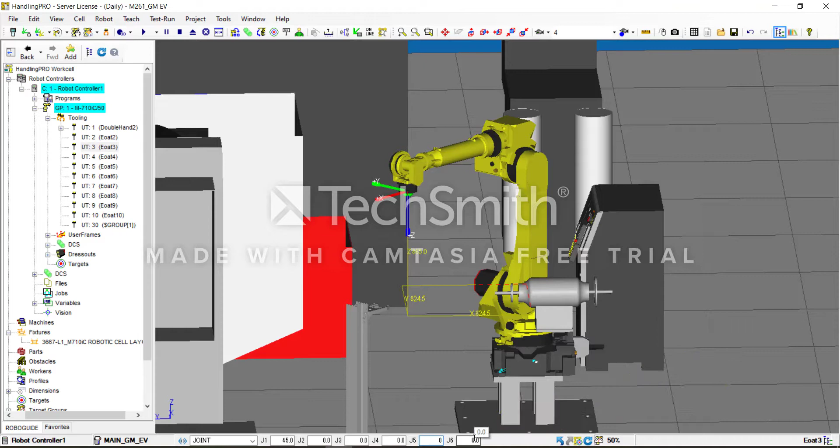Take note of the tool coordinate system's origin and direction. The origin is at the face of the end of arm, Z is away, and X is plus. So let's go to Solidworks and set up our end of arm tooling coordinate system so that it matches the robot's point and direction.

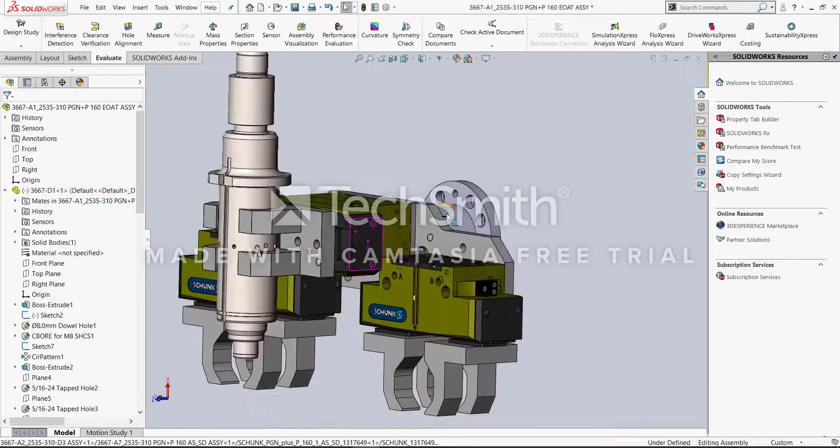So first, let's set the Z to the flange face. We will do this by mating the front plane to the flange of the end of arm tooling. And let's take a look at our coordinate system. It matches. Z is away, X is plus, and Y is to the left.

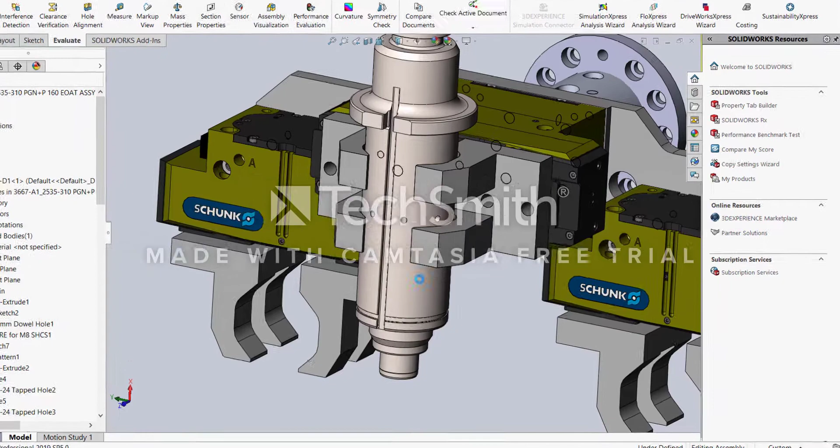Now we have to save this as an IGES file, as that's what's required in order to upload it into Roboguide. End of arm tooling assemblies. So now we are ready to import the end of arm tooling onto the robot arm's end face. And since we already have the origin set in Solidworks, we'll make it even easier.

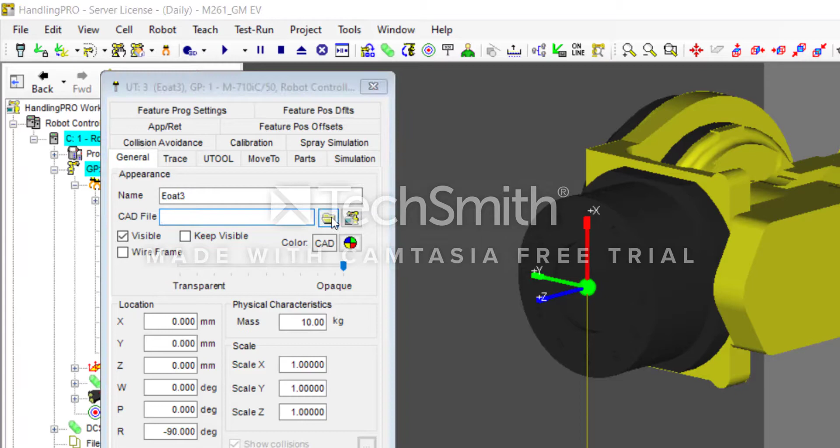Open up User Tool 3 in the General tab in the CAD file. Let's browse for it. End of arm tooling assemblies, default configuration. And then apply. As you see, our end of arm tooling is now on the end of the robot. But in this application, we actually need to rotate along the shaft's axis in our programming.

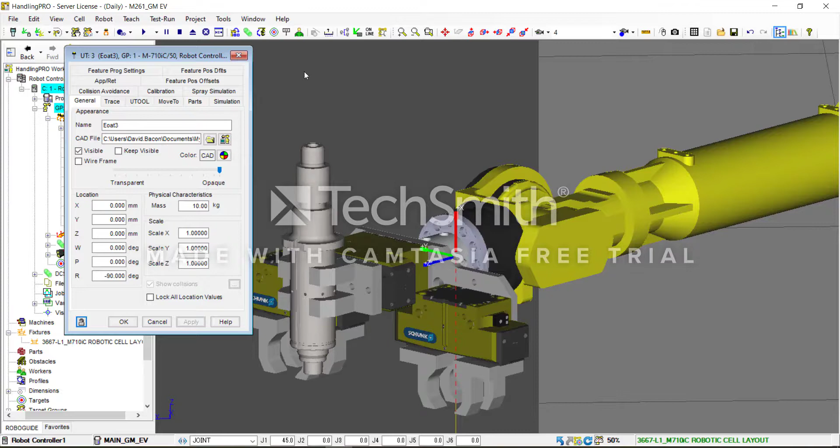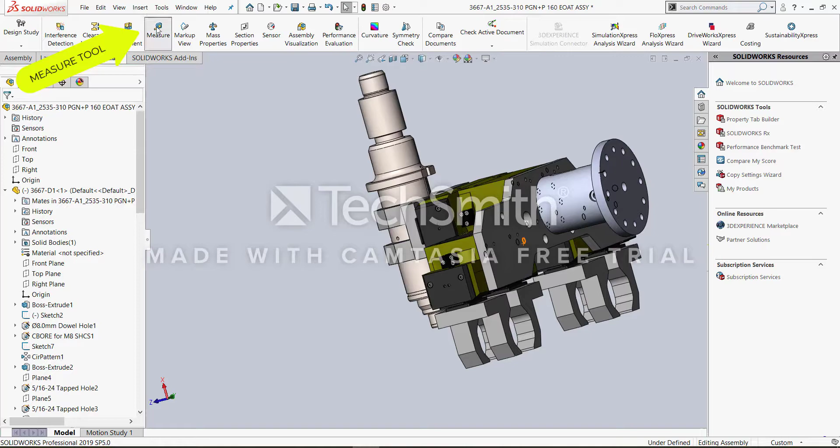So in order to do that, we want to move the origin of the tool from there to the center of the shaft. And the way we do that is in the User Tool tab. We'll just go from the top view. In the User Tool tab, we have to adjust the Z value. In order to find the Z value, go back to SolidWorks, and we will measure from the flange face to the piece part. And we'll take note of this distance of 302.16 millimeters.

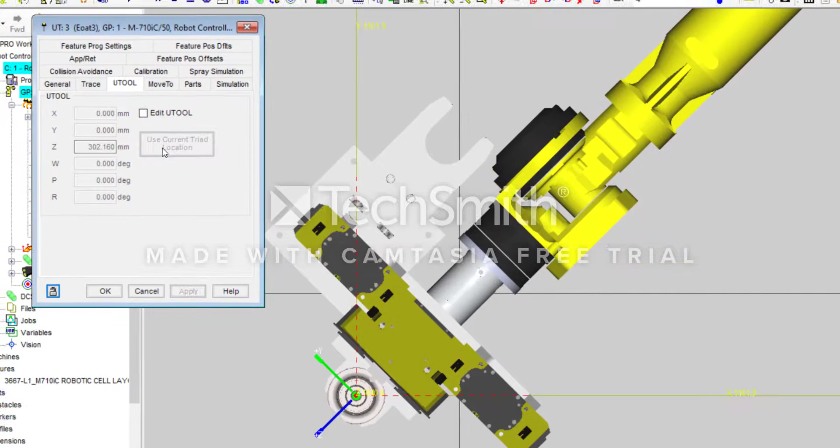So in User Tool, we need to edit it, and in the Z value, we'll type in 302.16 millimeters. And you'll see now the origin is at the center of the shaft. So let's see why that is important. In this application, we're going to deburr 3 areas of this part, and then we need to rotate it in the rechucking station so that we can get the same features on the other side of the part.

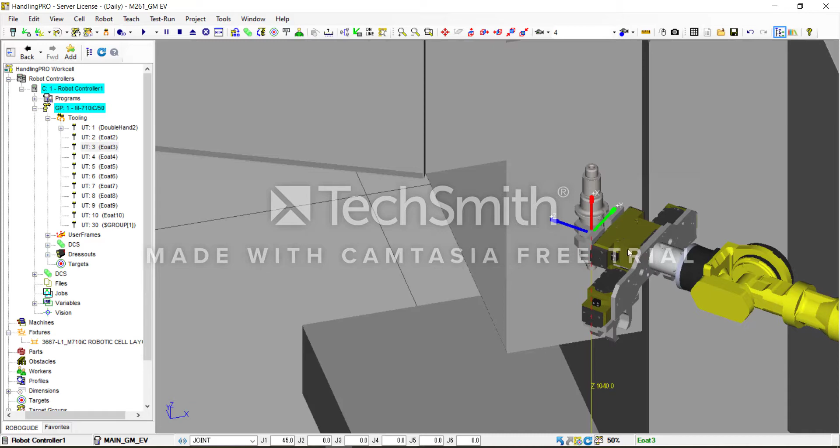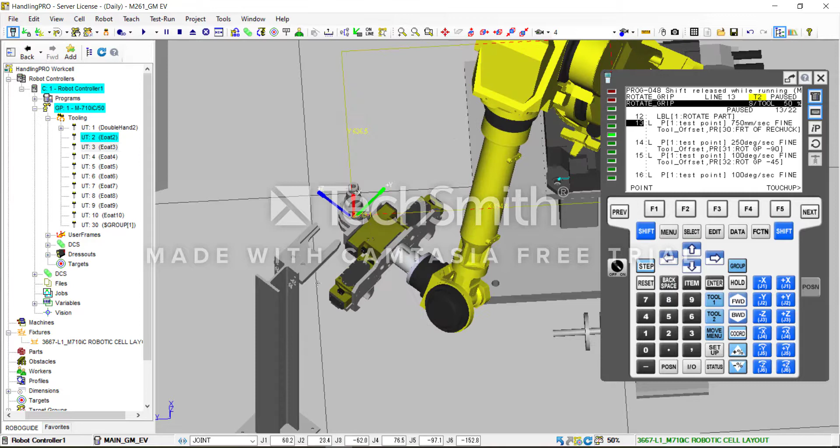So we will start our program. As you can see, we're deburring one area, deburring the other area, and now we're going to rechuck it. So let's get an aerial view of this operation and show why it's important to set the origin at the center of the shaft. So let's continue our program. Now rotating it, and we're going to pick the part up from the other side now. So again, we can deburr it in the same fashion, but the other side of the part.

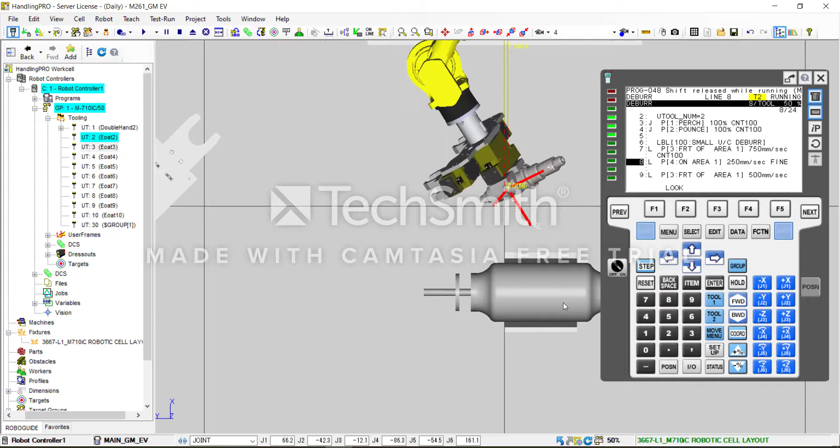So, thank you for watching. I hope you learned some good real-world practices to improve your Roboguide proficiency.